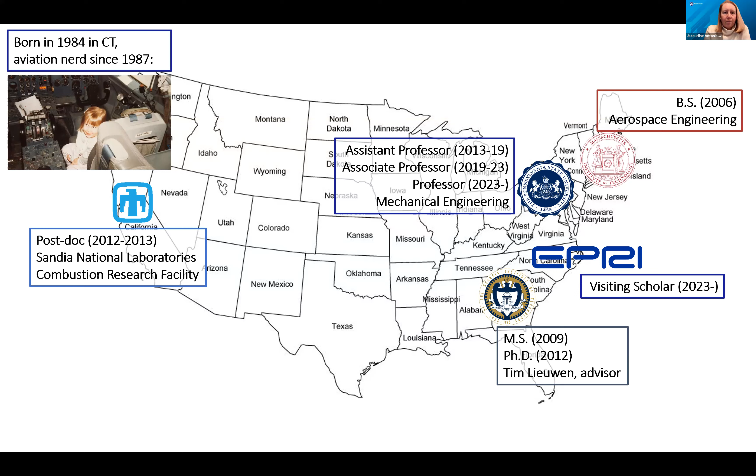Okay, cool. So that's who I am, why I'm interested in aviation. Let's talk about aviation and climate change. So this is a breakdown from the IPCC report on greenhouse gas emissions by sector. And today we're going to be focusing on transportation, and some parts of transportation fall into what people often refer to as the hard to decarbonize sectors. I would posit that personal transportation, like your cars, are not hard to decarbonize. I just bought an electric car, and drive a hybrid as the other car.

But airplanes, for reasons that we'll talk about today, are very hard to decarbonize, or at least they're very hard to electrify. And so transportation, that 14%, is where aviation falls. And like I said, I'd argue it's hard to decarbonize.

If we now break out transportation, so this is again from that IPCC report through time, what you can see is that most of the carbon emissions are coming from road. And that includes everything on the road: cars, what are called mid-class trucks, like your UPS delivery vans, as well as the heavy Class 8 trucks that are pulling freight.

And in the green right here, the dark green is domestic aviation, the orange is international aviation. And so together it's making up, let's say, a little over 10.5% of the transportation emissions. That's about 2% of the global emissions. So on the whole, we're not producing a crazy amount of CO2 from aviation.

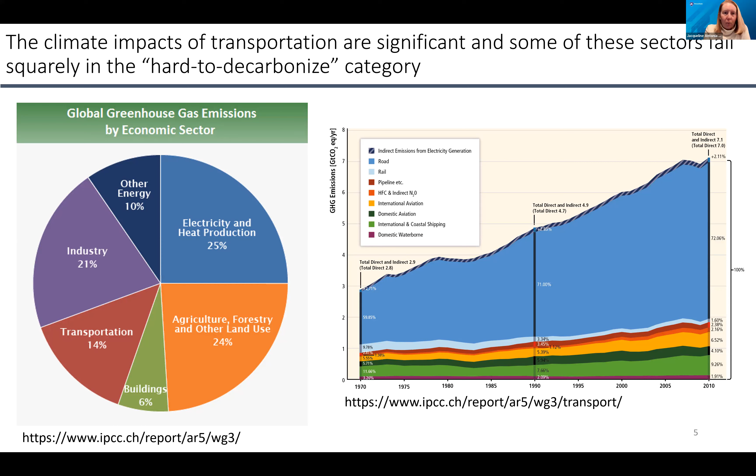All right. So that's where aviation falls on the climate spectrum. Let's talk about what we're going to do about it. And if you really want to understand what very smart people are thinking about, there's a really excellent National Academies report. Actually, the co-chair of this report is a professor at Penn State. Her name's Dr. Karen Thole, and she's amazing. She is a colleague of mine who also works in sustainable aviation, but this gives the real details about what the promising technologies are for decarbonizing aviation, particularly commercial aviation.

If you're not a STEM major, this report's going to be a little overwhelming, but there are some good charts in there and some details that, if you are a STEM major, I encourage you to read. The report outlines 4 approaches, and these are the approaches that most folks think are going to drive decarbonization of the commercial aviation sector in different amounts. The first one are sustainable aviation fuels. That's what we're really going to focus on today.

If you look at this projection, this is more of an industry-based projection, not as much an academic-based projection. You can see that technology improvements account for 22% of the reduction. Operations, 10%. So that's like how much time you're spending circling the airport before you land, how you get off the ground, that sort of thing. That's operations and infrastructure. But a whopping 61% is going to come from the fuel you use. And industrial sources right now, that's airlines, people who make engines and airplanes, are generally pointing to sustainable aviation fuels as the way that we're going to get there.

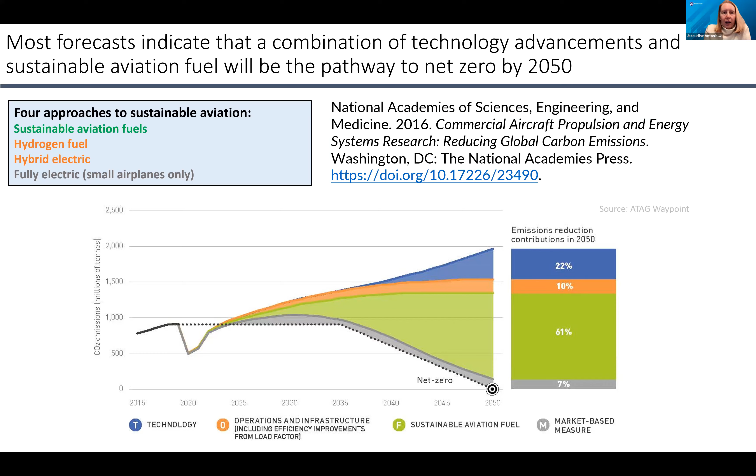So these are the technologies, but like I said, we're going to focus on sustainable aviation fuels because this is what people are working on now. And to be perfectly honest, in my expert judgment, this is what's going to get us there. So Penn State has a lot of expertise in sustainable aviation fuels, and we're going to talk about more of this at the end. But this is a whole of Penn State approach, right?

Actually, some of the best work in sustainable aviation fuels is happening on the feedstock end in the College of Agriculture. There are people looking at how to make the fuel and then also how to integrate it into aviation. And so these are centers, research centers, and colleges that are doing this type of work. So there's a lot of really exciting stuff happening at Penn State.

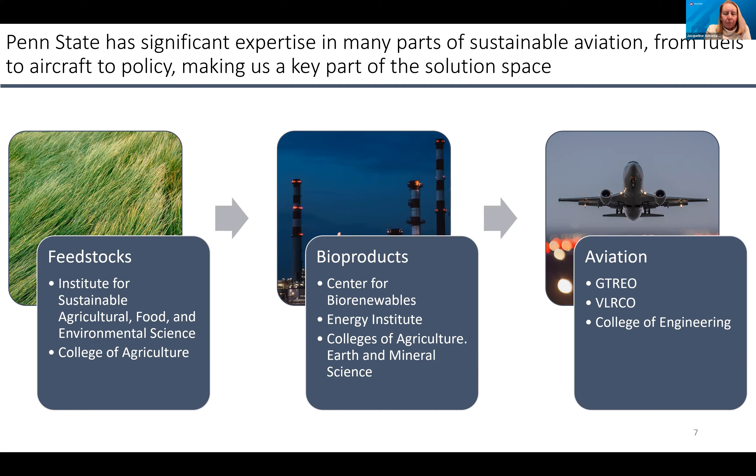Okay, so I love this chart. It's a little bit of a spaghetti chart, but I think it really shows what's going on. So on the left are fuels. And this is, again, from the IPCC report. This is how much energy we're using in exajoules, right? So very, very large amounts of energy. And these are the different fuels that are going into different uses. So heavy road transport, that's like freight trucks. Light road, that's your car, air travel, and then rail.

And then you can see we've broken out transport by freight and passenger, which are also almost equal contributors. Oh, and then there's water, which is marine, right? So ships, barges, that sort of thing. And then the fuels that go in. So if we focus on air here in the middle, the way to read this chart is to start in the middle. We say, okay, where is the fuel coming from?

The vast majority of the fuel is coming from heavy oils, particularly kerosene. That's the fancy name for jet fuel. And just smidges are coming from other sources of fuel. The gasoline and diesel are mostly personal aviation. Your little Cessna that you'd fly to get out to an island or something. Breakdown, most of this is passenger, so that's really what we're focused on today, but everything we learned for passenger can also go to freight.

The important picture here, though, is the mechanical energy versus the losses. This is thermodynamics. You can't completely convert heat to work. The second law doesn't let you do that. The heat here is the fuel. The work is the mechanical energy to push the airplane forward. And you can see that the efficiency here, which is the mechanical energy over the total amount of energy that you're putting in, isn't great, right?

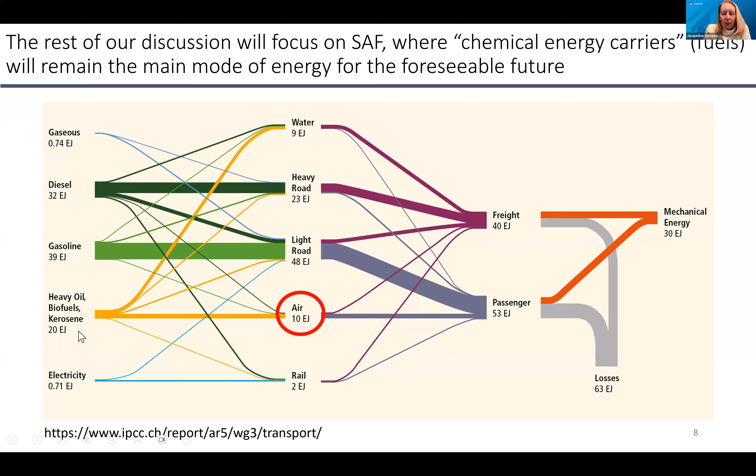And so this is where a lot of those technology improvements are going to help. But the second law of thermodynamics says you can't derive a perpetual motion machine. It's not going to get you all the way. So we also need to think about how we're going to replace this fuel. So that's where sustainable aviation fuels come in.

All right, before we talk about sustainable aviation fuels, it's important just to talk about aviation fuels. So what is jet fuel? If you put on your chemist hat and you looked at what jet fuel is, it's a bunch of hydrocarbons, which are molecules that are made of hydrogen and carbon. They come in different shapes. We don't have to go over the shapes, and they come in different sizes.

So that's the carbon number. So how many carbons are in the hydrocarbon? It's sort of a mid-range. It's heavier than gasoline. It's lighter than diesel. So if you were going to put on your academic chemistry hat and you said, what is jet fuel?

You'd get a picture that looks like this. However, if you were going to put one in real life, what is jet fuel? Jet fuel is not specified by what's in it. There's no rule that says jet fuel has to have a certain amount of whatever molecules. There's an ASTM standard that tells you what jet fuel is.

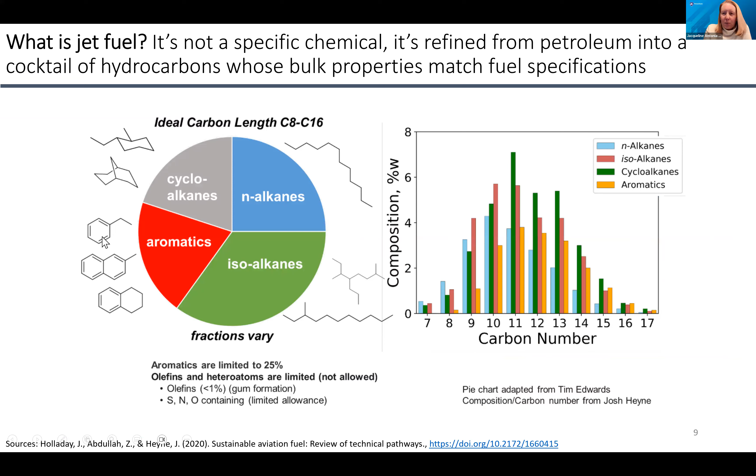But then how well does it boil, or evaporate? What's its density? What's its viscosity? How much energy does it have? How fast does it corrode the parts, the tank that it's sitting in? All these things are what make jet fuel. And it goes through a very complicated series of tests in order to get there. All petroleum-derived jet fuels have been through these tests, and now refiners can make the jet fuel and they don't have to go through the test again.

So then what is sustainable aviation fuel? Well, sustainable aviation fuel has to meet all these same criteria, right? You've got to drop it in the same tank. It has to be used by the same engine, but it comes from a different source. And recently the FAA has said that sustainable aviation fuels have to reduce the carbon impact of burning jet fuel by at least 50%. It doesn't have to be 100% renewable. It has to be 50% less carbon intensity.

They can come from a bunch of different places. And so these four points here are the different molecules we were seeing before. It's really easy to make some of these molecules, isoalkanes. We have a whole bunch of different ways of doing that. It's very difficult to make cycloalkanes, but they're really useful molecules. So there's still a lot of stuff under development.

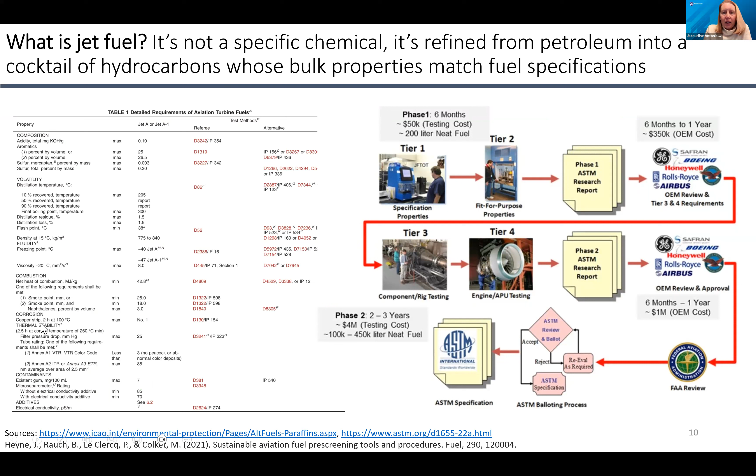Right now, you can only put a maximum of 50% sustainable aviation fuel in your airplane. The other 50% needs to be petroleum derived, except if you're on a test flight, because we don't have the confidence yet that all these things are being met. And for very good reason, the aviation industry is very safety oriented, right? When planes fall out of the sky, it's a really bad day. So we're working on it.

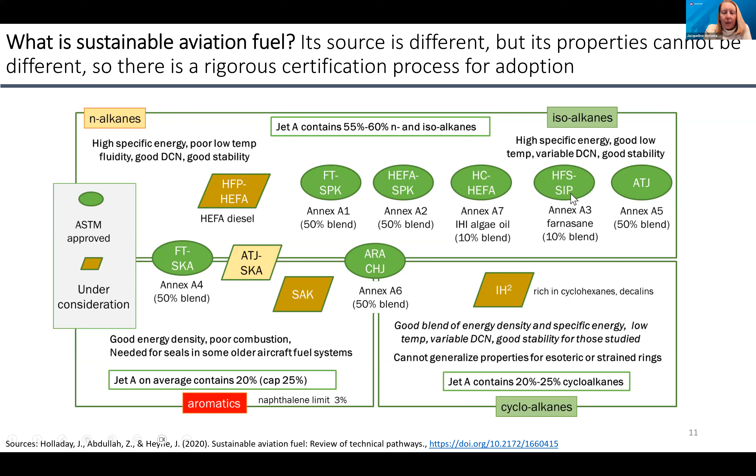So like cooking oils from McDonald's, like fry oil, you can turn that into jet fuel. Animal fats, what are you going to do with the rest of the animal when you turn it into food? You can turn it into jet fuel. Municipal solid waste, so basically garbage, can become jet fuel. Crops, you can grow some cellulosic crops or some seed oils to become jet fuel. Or you can grow a crop, turn it into an alcohol, particularly ethanol, and then turn ethanol into jet fuel. That's a pretty well-established pathway.

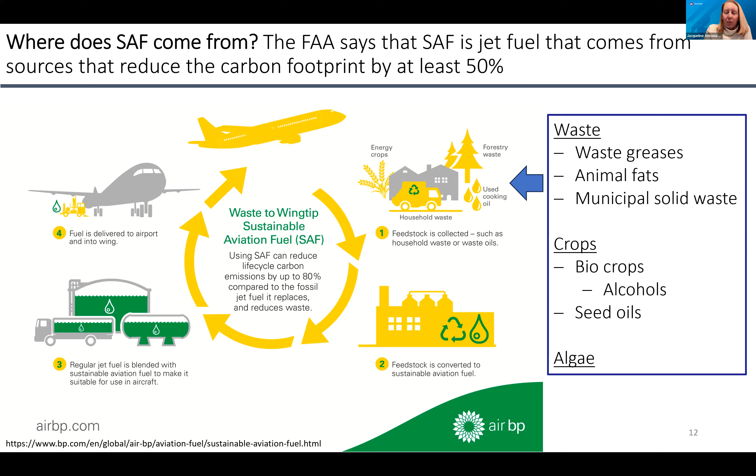And then some folks are looking at growing algae. This is not done on any meaningfully large scale because algae right now is a very finicky little animal. Or plant? Is it a plant? I don't know. Anyway, it's difficult to grow in large quantities to make it meaningful as a feedstock. So this is where all these things could come from. And hopefully in our discussion, we'll have a number of discussions of the pros and cons of all these different sources and turning them into jet fuel. So why does fuel composition matter?

Like, why can I only put 50% in? Well, it's obviously because it's the energy source, right? There's a lot of very complicated stuff happening in the combustor. This is my area of expertise, combustor fluid mechanics and combustion. You need the fuel to do the same thing, regardless of what it's made out of. Because when the flame goes out, particularly when you're at 40,000 feet, it's a bad day. And so, you need it to perform the same in the combustor.

But then it also has to interact with the airplane. So this is an interesting picture from Boeing showing you where the fuel is in the airplane. There's a bunch in the wings and then a tank in the tail. It's got to interact with the materials of the airplane. It's actually used as a hydraulic fluid.

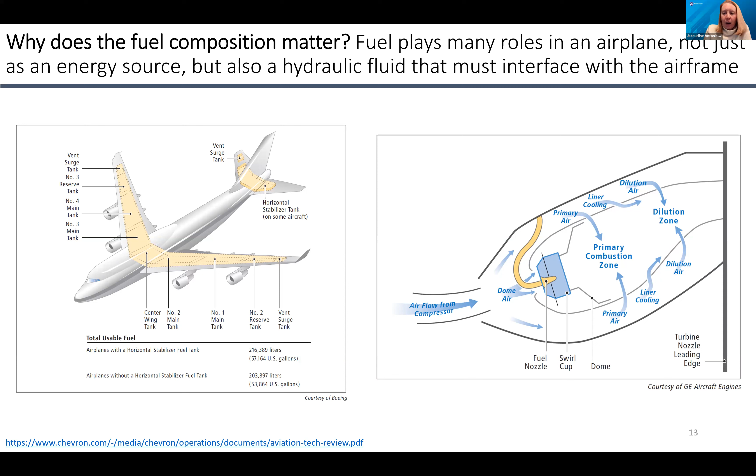Before it even gets to the airplane, it has to sit in trucks, and be delivered in hoses. And before that, it has to sit in tanks and not separate. That's a big problem. And so the storage and handling and interaction with people, even before it gets to the airplane, all have to be considered when you're trying to certify an aviation fuel.

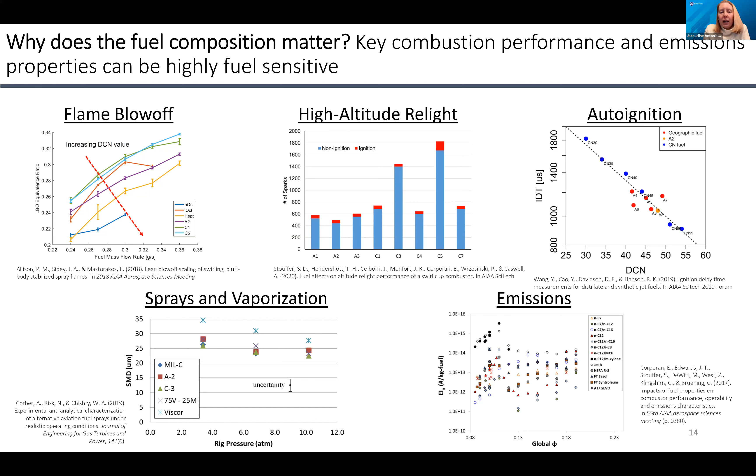All these different letters, the things that start with A's and C's, those are different jet fuel types that mimic different types of renewable or sustainable aviation fuels. And the real point here is that these numbers are not the same, right? And so depending on the blends, depending on how you make it, right now there are differences, and we're trying to understand as a research community, does it make a difference?

All right, so what are we doing about it? There's a lot of research that's happening that's funded by the US government, that's funded by the European government, that's funded by individual aircraft engine companies and aircraft companies, and we're working really hard to figure it out.

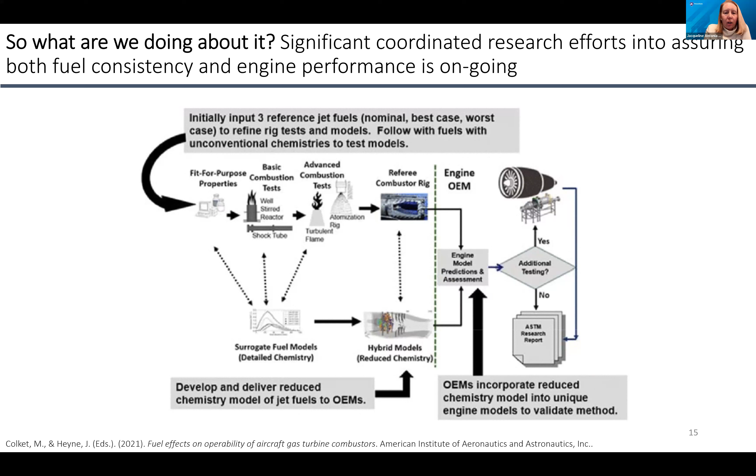Once we've made it, then there's some really exciting work happening in how do we burn it. In particular, we have a lot of expertise in particulate emissions. So this is some data from my lab, different fuels, and how they burn and how they soot. And a professor named Randy Vander Wal is one of the foremost experts in soot morphology and how it forms, particularly for aviation applications.

We're trying to make engines more efficient, right? So even if we have a good fuel, we can boost our efficiency by working on the engine itself. And there are a couple labs at Penn State, particularly the START lab and the ExCCL lab in mechanical engineering, that are working on that.

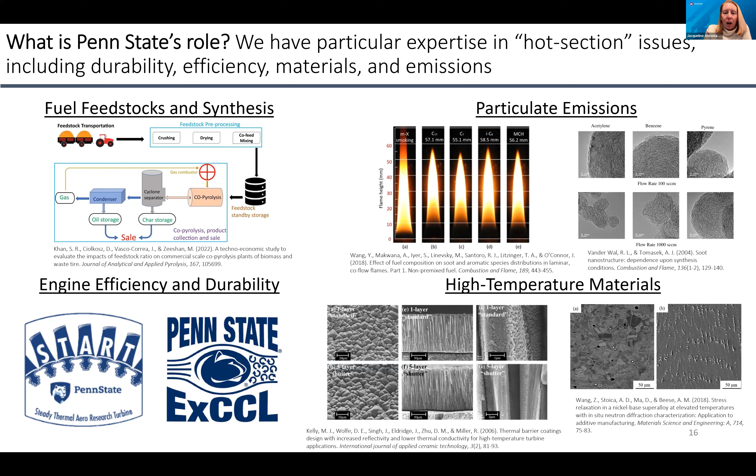And then, we can make things even better if we can make them hotter. And there are people working on both high temperature ceramics as well as really unique high temperature metals that are allowing us to get to higher efficiencies and just make the engines last longer, which is also important.

So hopefully you found that interesting. I also hope that I don't have to use this video, but I'm looking forward to our discussion and talking about some of the ethical implications, particularly on sustainable aviation fuels.